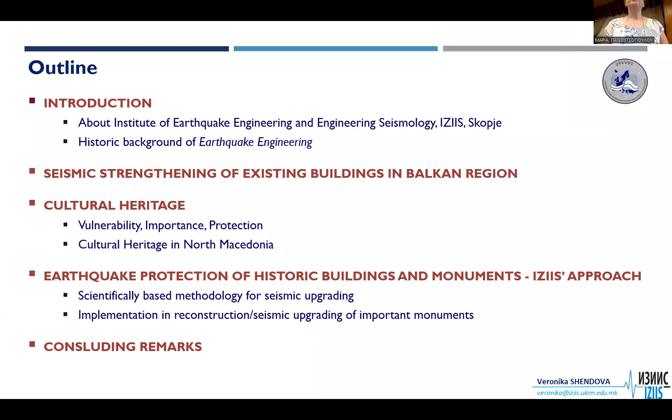I will speak today about the historic monuments and buildings in our country. I will start with some introductory slides about our institute and about earthquake engineering as a discipline. Then I will speak about this issue in the Balkan region in general for cultural heritage, and cultural heritage in our country. Then I will present the integrated approach which our institute developed and implemented in various monuments.

Our Institute for Earthquake Engineering and Engineering Seismology was established in 1965 upon the recommendation of UNESCO within the St. Cyril and Methodius University Skopje. While meeting the immediate needs for the recovery of Skopje after the catastrophic earthquake in 1963, it created conditions for permanent progress in education and training, in research and science, and of course in applying this knowledge into everyday practice. In its basic activity, our institute is organized through 6 departments, 5 laboratories, and one Center for International Cooperation that we present today here.

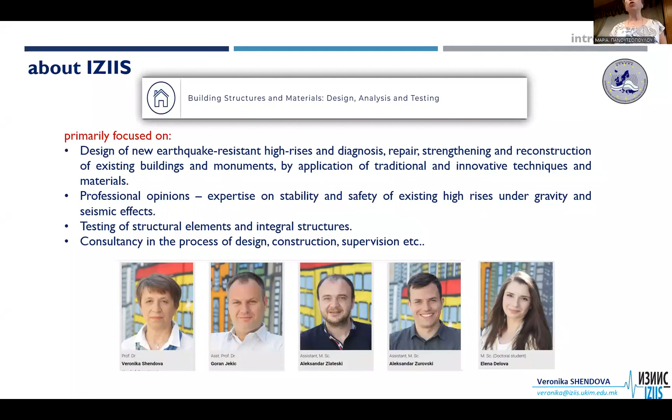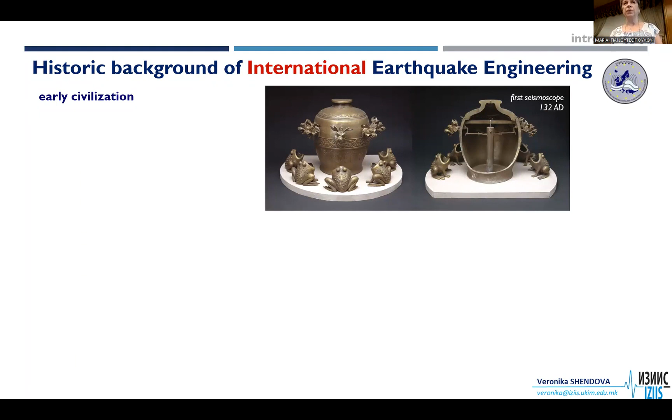Because our institute is inevitably connected with earthquake engineering, the next slides will recall some historic background. The protection from earthquakes begins with the early ancient civilizations, although at that time earthquakes were considered as God's will or the products of mystic forces. Interest in earthquakes and their consequences increased in the 19th and beginning of the 20th century, mainly after the major earthquakes in United States, Italy, and Japan.

This resulted in the establishment of very important institutions in those countries, and the birth of practical seismic design analysis of earthquake resistant structures by means of the equivalent static method, which later on was adopted in several codes.

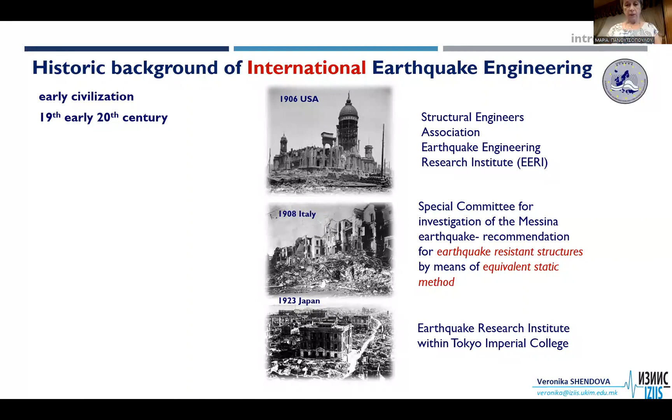We can say that the modern approach to earthquake engineering starts with the first International World Conference of Earthquake Engineering, commemorating the 50 years of the San Francisco earthquake in 1956, when there were only 40 participants from 11 countries with only 3 topics. The second one in Japan was when the International Association of Earthquake Engineering was established. This is the most important event, because since then these conferences are organized every 4 years, with continuously increasing numbers of participants, topics, etc.

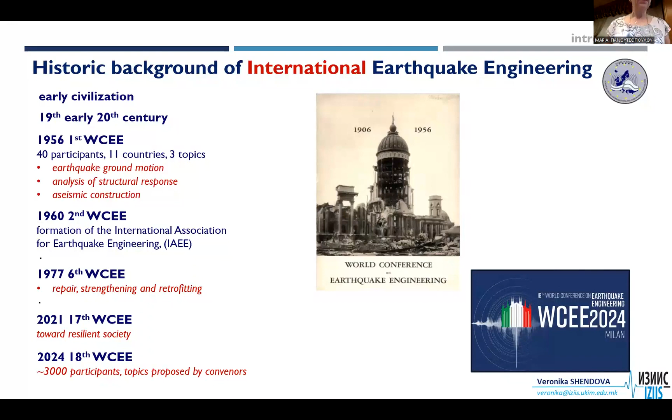The repair, strengthening, and retrofitting appears in 1977 during the 6th World Conference, coming to the motto towards resilient society in the last one in Japan, which we can say reached the ultimate goal of earthquake engineering, which is to control the seismic risk at socio-economically acceptable levels. At the next one in Milan, it is expected that more than 3,000 participants will attend, and the novelty is that the topics are proposed by the convenors.

Similarly, we can speak about the development of European earthquake engineering. The key event for European earthquake engineering was the 1963 catastrophic Skopje earthquake, which caused 1,071 deaths, more than 3,000 injured, and losses calculated to equal 15% of the GDP of ex-Yugoslavia in 1963. This was a really unique earthquake among all the earthquakes in Europe and the Mediterranean, because it triggered a high level of awareness among all participants, the government, engineers, politicians, etc.

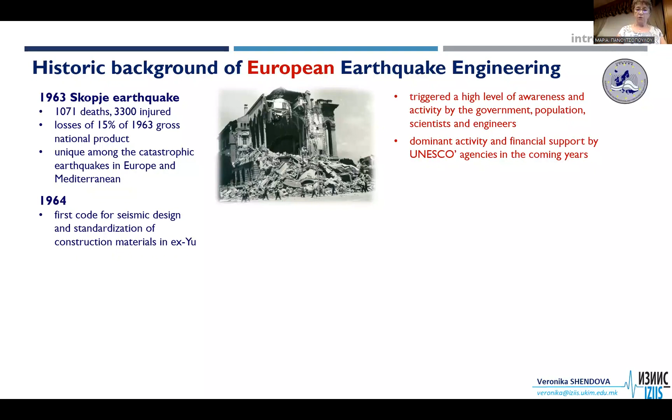This high level of awareness and activity by the government led to the need for implementation of organized and sustainable effort in disaster risk management. A very important role, as Professor Tassios mentioned, was played by UNESCO through their activities and financial support for these activities. For us, the most important outcome was the enforcing of the first seismic code in ex-Yugoslavia and first standardization in 1964, and the establishment of the European Association of Earthquake Engineering during the first international seminar, which we now call the first European Conference on Earthquake Engineering, a symbol of the beginning of European earthquake engineering.

And of course, this conference is also well organized every 4 years. The next one will be in Berlin in 2026.

During all of these conferences, great lessons have been and will be learned about earthquake performance, earthquake nature, the performance of structures, geotechnics, etc. And the majority of them have been accepted and incorporated into the codes.

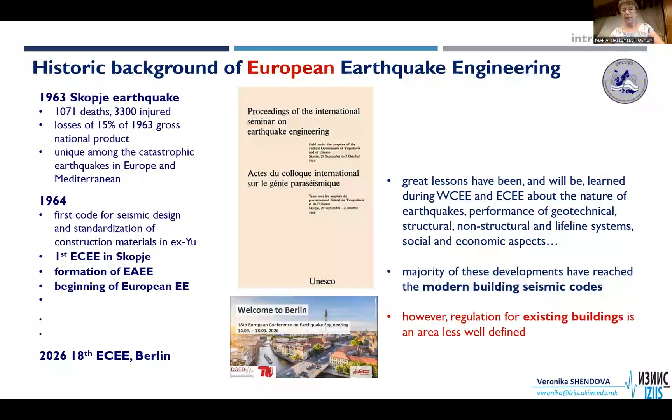However, the application of regulation to existing buildings is an area less well defined. So what happens in the Balkans in this way? Significant for this issue in the Balkan region is the manifestation of seismicity.

Skopje earthquake 1963, Debar earthquake 1967, Banja Luka earthquake 1969, all in the territory of ex-Yugoslavia, Vrancea earthquake 1977, Thessaloniki earthquake 1978, and Montenegro earthquake 1979.

So in only 15 years, several deadly earthquakes caused demolition of most of the building stock, many injured, and more than 3,000 deaths.

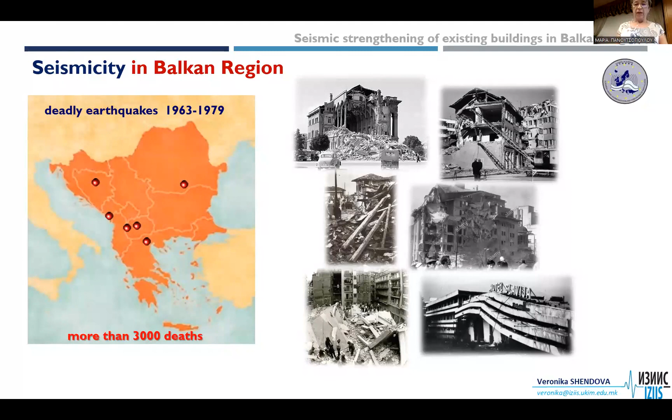The extremely important role in overcoming these problems, again, was played by the UNESCO agencies. First of all, because of the formation, establishment, and financial support of our institute from 1965 to 1982, and especially through starting and realizing the implementation of several projects due to the seismicity of the Balkan region, the earthquake risk reduction, and the construction of earthquake resistant structures.

The final one, which was mentioned by Professor Tassios, is the building construction under seismic conditions in the Balkan region, UNDP UNIDO conference, 1979-1984. The most important, why?

Because in carrying out this project, the participation of the governments of Bulgaria, Greece, Hungary, Romania, Turkey, and Yugoslavia took place. And it ends in results with several volumes which reflect the experience of the participating nations.

The fifth of them, entitled Repair and Strengthening of Reinforced Concrete, Stone, and Brick Masonry Buildings, was aimed to give instructions and define the whole procedure of repair and strengthening, drawn, of course, on the experience following all of these deadly earthquakes.

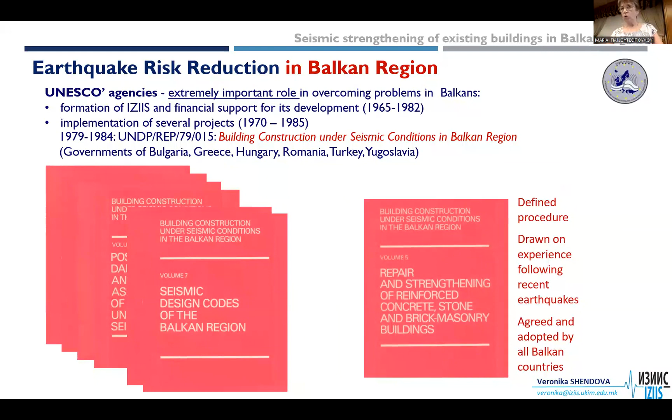And which is more important, it was agreed to be adopted by all these participating Balkan countries. Without going into details, what was written in this volume?

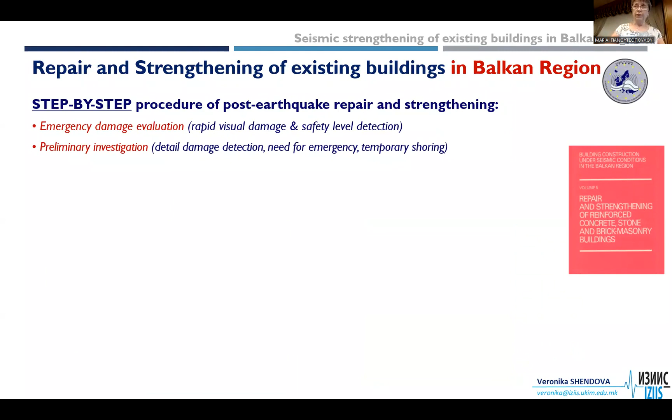As I said, this is the step-by-step procedure of post-earthquake repair and strengthening, starting with emergency damage evaluations, which should be done for each building by the inspection team to determine the usability level. Then preliminary investigation, done by the structural engineer, to determine the cause, nature, and extent of damage, and consequently the need for emergency and temporary shoring.

Definition of seismic parameters for the region. This means the seismicity, the seismic potential of the region, through different types of PGA, dynamic amplification factors or spectrums, etc. But all the countries agree that it should be defined.

Then designing the criteria for repair and strengthening, mentioned many times here. The most general ones are that we have to have linear behavior of the structure during moderate and slight earthquakes, which can be correlated with the performance of the structure by relative story displacement, but anyhow ductility less than 1, because this is elastic.

And we can allow the building to have nonlinear deformation for more severe earthquakes, which means ductility more than 1 for different types, different numbers, but not to disturb the global stability of the structure. These are the most general criteria adopted by the Balkan countries.

Then we have to do an additional investigation, mentioned several times here, for the completion of knowledge of the as-built structure, meaning documentation, investigation of the bearing elements, the built-in materials, construction details, and damage analysis and evaluation.

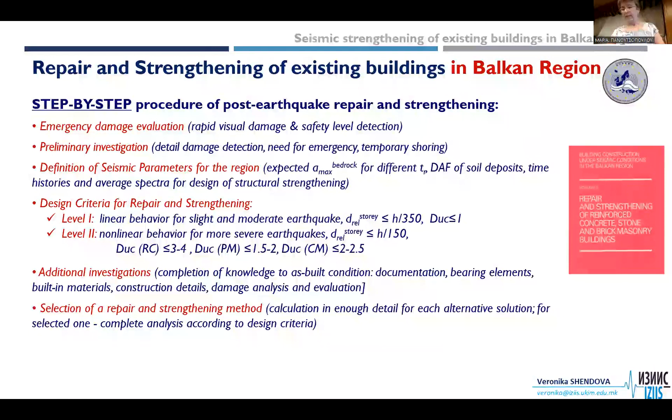And final design procedures, also mentioned several times here: detailed calculation and structural analysis for defined seismic parameters, for code requirements, etc. So all of this was written into the 1984 volume 5 of this very valuable conference.

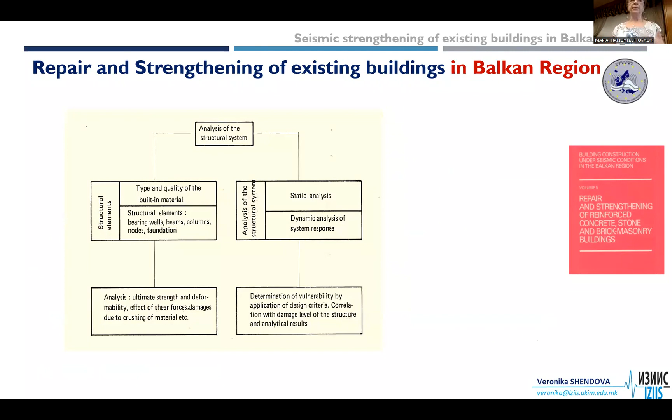Of course, analysis should be done on the corresponding mathematical model, taking into consideration the whole situation of the structure itself, the structural system, and the bearing materials, and it can result in either repair or repair and strengthening.

And in this context, as mentioned by Professor Stylianidis, repair is only the re-establishment of initial strength of the damaged part, and the properly repaired structure should have enough strength, but maybe somewhat reduced stiffness because of fine cracks, which is impossible to recover.

And it can be done, of course, after the damage of the structure. But strengthening, or reinforcing as translated by our translators here, is the judicious modification of the strength and/or stiffness and/or deformation capacity of the structural members or the structural system.

And it can be done in different ways, either by strengthening existing elements or by introducing new ones for increasing the lateral resistance of the structure.

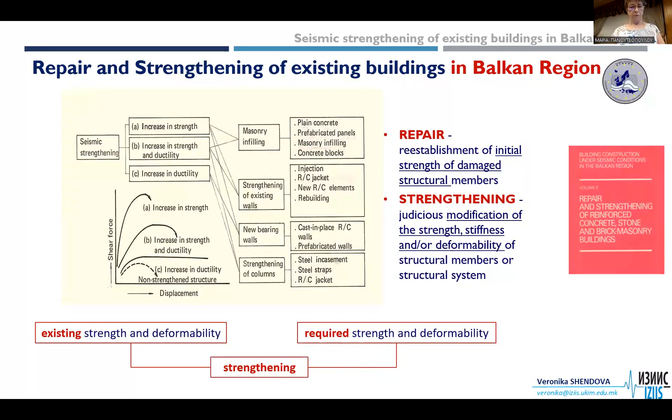The strengthening should bridge the gap between the existing and the required or demand strength and deformability. In keeping with this philosophy, on the territory of ex-Yugoslavia, these volumes are still regarded as unmatched in defining this step-by-step procedure and all the explanation that goes with it. In keeping with the philosophy of these manuals, our institute succeeded to repair and strengthen dozens of structures with different functions, structural systems and materials, after the major earthquake in Yugoslavia. So this is post-earthquake strengthening.

Now coming to cultural heritage. We all know that these monuments are vulnerable both to man-made and natural disasters throughout historic time, on nearly every continent. We are witnessing very heavy damage to these structures during earthquakes. Why is it like that? Because these are brittle and very stiff structures with stiff structural elements, which prevent the structure from being able to sustain the deformation required by earthquakes.

But there is also intended damage to cultural monuments, unfortunately. For example, during the disintegration of Yugoslavia: the shelling of Dubrovnik, the blown up church in Mostar, the blown up old masonry bridge in Mostar, then the fire in the Prilep Mosque, the detonation of the Lešak Monastery, fire in Kosovo, and of course the most recent one, the civil war in Syria, etc. So there are many of them.

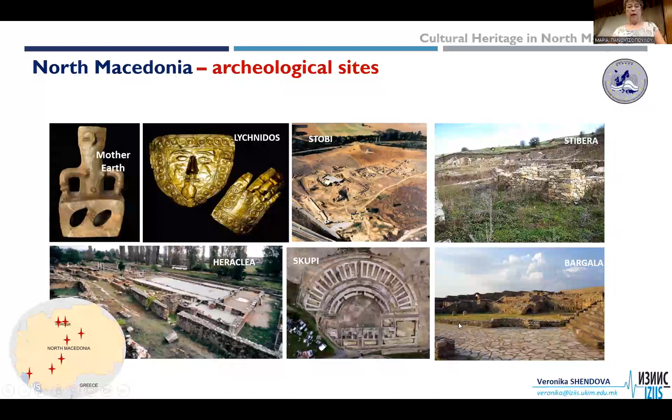Representative for the medieval times are the Byzantine churches in our country, which is of course the topmost architectonic creation, with an extraordinary collection of valuable fresco paintings. We have more than 150, starting from the 9th to 14th century.

But it seems that the Ottoman presence on our territory for 500 years left its own mark and special traces on the physiognomy of the bigger cities, in the old part of Skopje, old part of Bitola, Prilep, etc., which is the cause because we have there many mosques, many inns, many hammams, clock towers, etc.

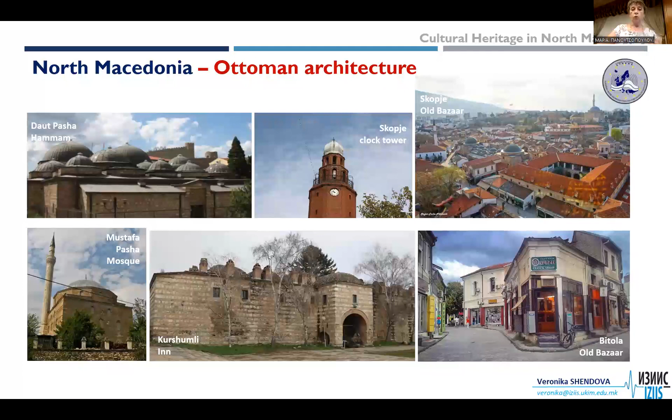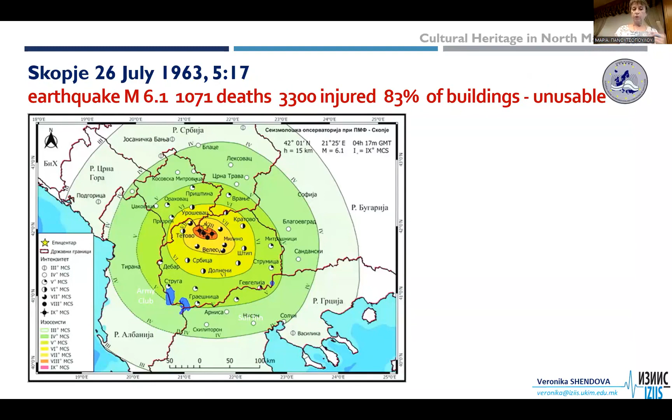But of course, because it's located in one of the most seismically active regions in the country, or in Europe, all of these monuments throughout existing times have been exposed not only to climatic and man-made effects, but also to earthquake effects. This was somehow confirmed with the Skopje 1963 earthquake. It was magnitude 6.1, and it was felt over a radius of about 200 kilometers.

This earthquake inflicted inestimable damage to the monument fund. The entire monument fund was more or less damaged. It was manifested by the failure of individual parts, like in Chifte Hammam or Suli or Kurshumli Inn, large structural cracks, or inclination of some parts of the monuments, while some of them have been lost forever.

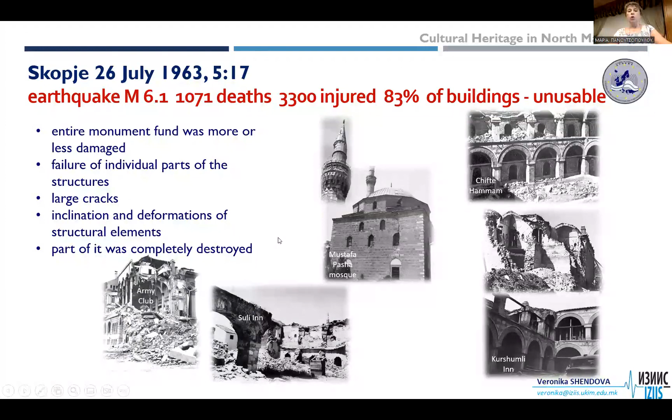So what happened in the post-earthquake treatment of the monuments? What was the legal framework? The recovery, post-earthquake recovery of Skopje starts in a period where there is a lack of knowledge, lack of regulation, lack of everything connected with earthquakes, because until then, on the territory of Yugoslavia, there is no such code or provisions. That is why the Yugoslav government starts the campaign for enforcing these guidelines and the first code in 1964.

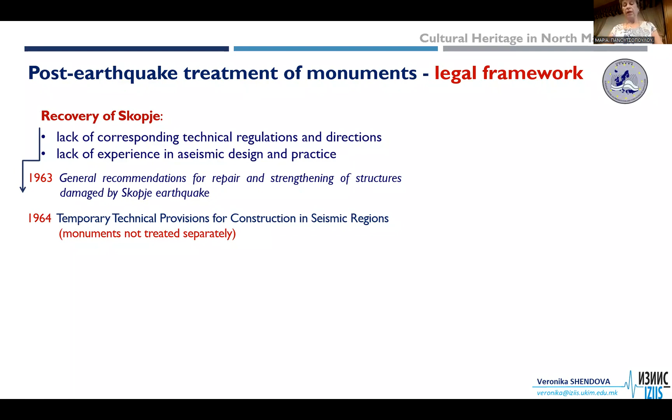But in both of these documents, there is nothing special for the monuments. This is only for new buildings, etc. Maybe repair and strengthening, but of ordinary structures. The first legal framework is in 1976.

This is the Law for Protection of Cultural Heritage. This is the very first legal framework, but there is only, let's say, some terminology, a glossary connected with labeling and categorization of the monuments, but a very poor one, of course, and some very beginning of the process of protection and organization of protection.

Following this were the Code for Design and Construction, an improved Code for Design and Construction of Buildings in Seismic Regions, and the Code for the Repair and Strengthening of Buildings. But again, the first one is for new buildings, predominantly reinforced concrete and confined masonry, and the second is for repair and strengthening of ordinary buildings. So again, nothing special about the monuments.

After the disintegration of Yugoslavia, our country enforced a new law for protection of cultural heritage, this time more precise and detailed, introducing responsible institutions, categorization of monuments in parallel with the regime for protection and use, guidelines for carrying out conservation research, and guidelines for how to elaborate conservation projects. Besides this, it also regulates the rights and obligations of owners, professional titles, and other issues. What's important is that this law, as a law, is a legal framework.

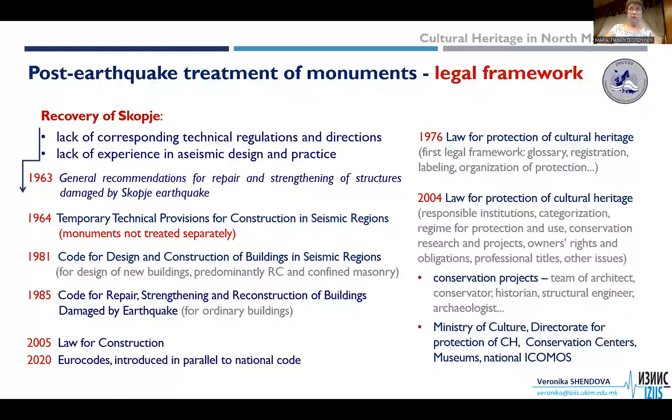The new law for construction was in 2005, and in 2020 we introduced Eurocodes for the first time, in parallel with our national code. We can say that our experience here is still exceptionally modest.

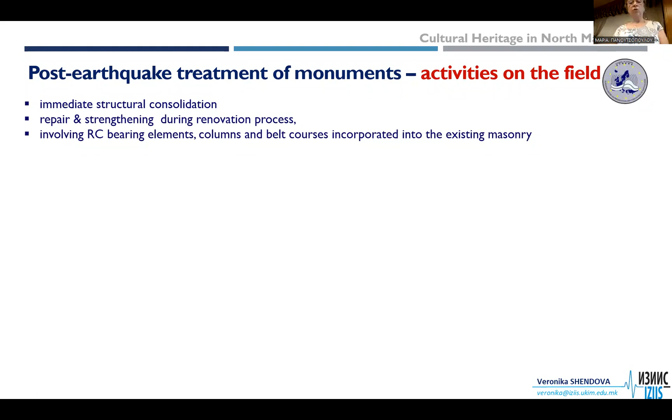So, post-earthquake treatment of monuments: what was done on the field? This starts immediately with structural consolidation, but in the process of renovation, especially for those monuments needed for modern use, the principle of repair and strengthening was involved. Unfortunately, based on the knowledge of that time, this involved reinforced concrete elements introduced into existing masonry. There are many of them that were recovered or reconstructed by introducing reinforced concrete.

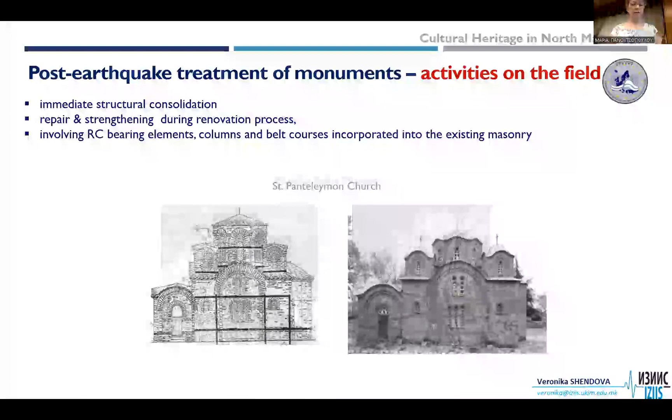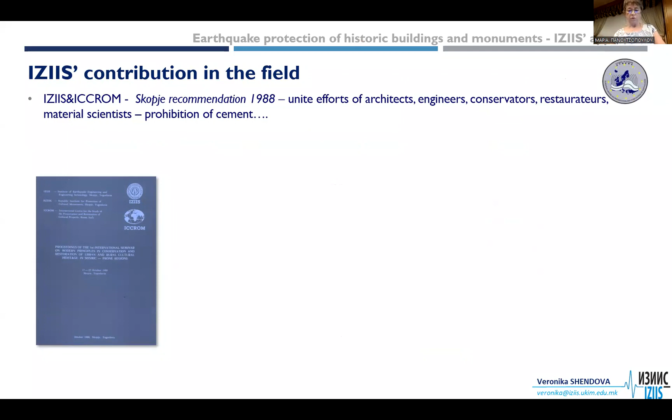Unfortunately, later on, during visual inspection of the monuments, it was estimated that this cement could obviously affect the original bonding material, the lime mortar. That is why during the ICCROM seminar in 1988, based on the ideas of architects, conservators, and engineers participating in this conference, the final document, the Skopje Recommendation, recommended a multidisciplinary approach connecting all these profiles and prohibited the use of cement in the subsequent retrofitting of monuments.

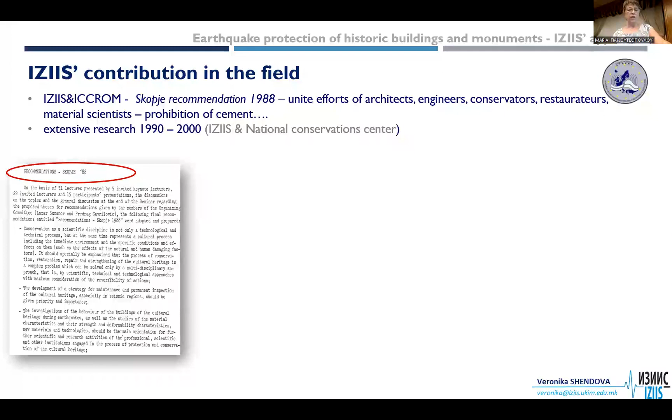And since 1990 until 2000, we became partners with the National Conservation Center, providing many different projects connected with finding the most appropriate ways to seismically upgrade our monuments.

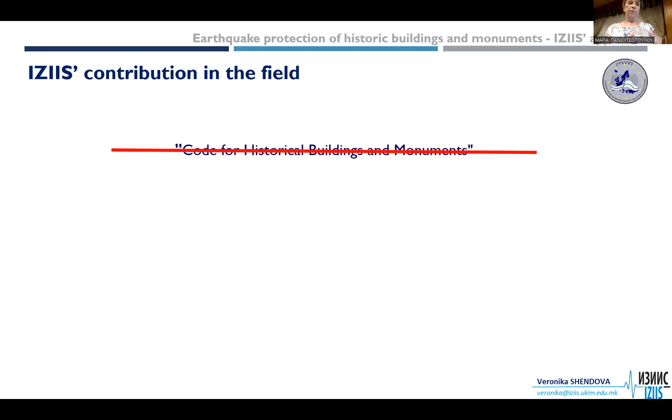Coming to the point where maybe we disagree with you: our starting point in our institute is that as professionals working in this field, we should strongly oppose the existence of a code for historic buildings and monuments. Why? Because codes become outdated, and all these monuments have been constructed in different times under different conditions. So we think that unification of requirements in one code may lead to the negation of the monuments.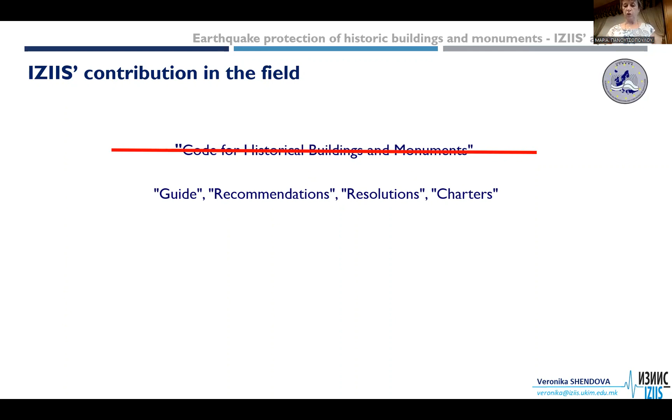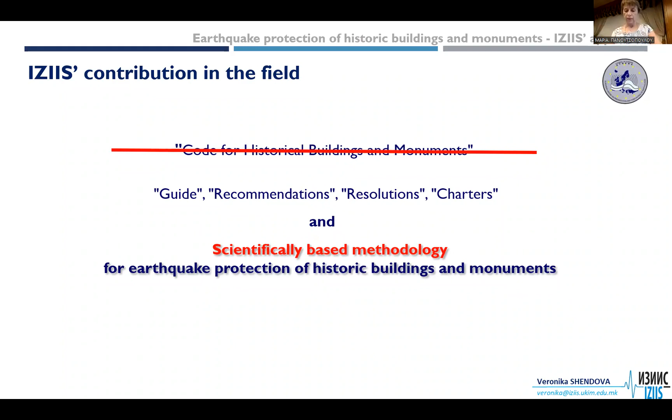But we, of course, recommend acceptance of guides, recommendations, resolutions, charters, and for exceptionally valuable monuments, to scientifically develop a methodology which will be implemented later on.

During several decades of working on this subject, our institute adopted one integrated approach protocol for the development of this methodology, and this is very similar to what you are talking about today. So we are saying it is the protocol, the approach, not a code.

First of all, we should review all the data we have: the technical, written, and photo documentation, archive investigation, because there is a lot from past years. We conduct interviews with the owners, read all the professional statements, to increase the knowledge level of the as-built structure.

Then we have to define the real seismic potential of the site where the monument is located, through seismic microzonation, and develop geophysical surveys and models, including soil profiles and soil effects, which will result in the demand or required peak ground acceleration for our analysis.

Then structural identification. As Professor Tassios once said, monuments are black boxes, so we have to learn from them. We spend time there just to see what the structural system is, identify the bearing elements, etc.

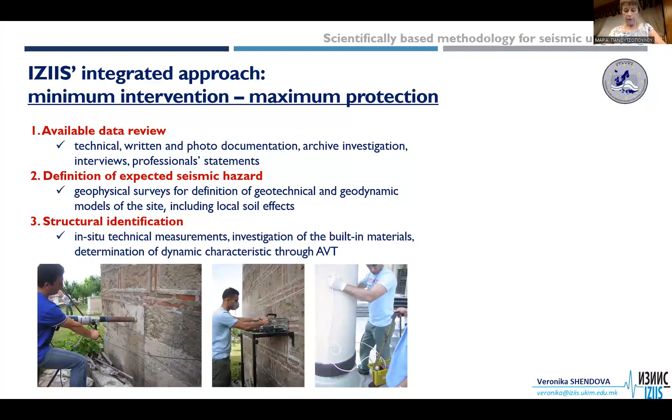Through different in situ measurements, we investigate the building materials. But what is rather specific is that in any case we are providing the ambient vibration technique.

This technique involves placing, at a specific level, very sensitive sensors which can measure vibration from the ambient environment, from the wind, from everything. Why is it important? Because we obtain the fundamental periods and mode shapes of the structure itself.

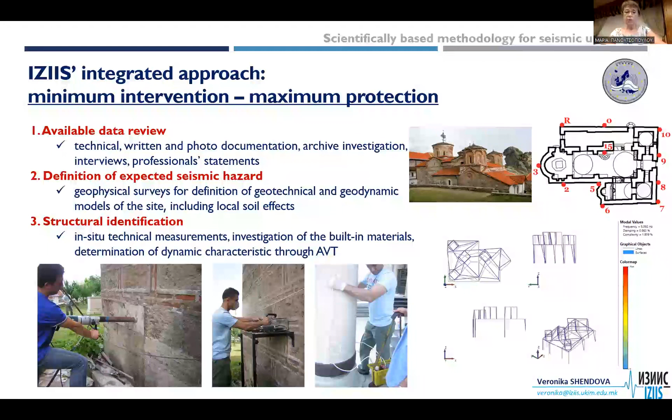If this is very precise, we can find out what are the disconnections, the points which are not good in the structure. This is very important because it is experimental testing in situ of the fundamental dynamic characteristics, which is the identity card of any structure.

Then structural analysis—there are different types, as mentioned several times, but what we do is 3D finite element modeling. We calibrate and modify the input values, especially the modulus of elasticity, until the fundamental period of the model structure equals the one experimentally obtained during ambient vibration testing.

So this connects the on-site situation with our mathematical model. Then we provide two different methodologies, which I will speak about in the next slides: bearing and deformation capacity, and time history response. Finally, we come to the seismic retrofitting.

The most important thing in seismic retrofitting is the definition of safety criteria. As many of us have said today, we have to know what requirements our structure should satisfy. Then we select the concept, materials, methods and techniques, and provide verification structural analysis, along with definition of field works and subsequent documentation—always keeping in mind that the strengthening or retrofitting should bridge the gap between demand and existing capacity.

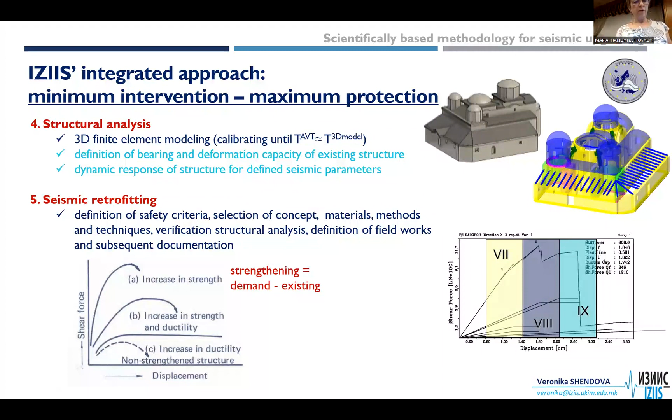Now, the key elements are the definition of bearing and deformation capacity and the dynamic response of the structure for the defined seismic potential, which is exactly the point.

What do we understand by bearing and deformation capacity? This is connected with volume 3. By the bearing capacity of a story of the structure, we understand the ultimate story transversal force, which compared with the demanded equivalent seismic force gives the safety factor against failure. The deformation capacity is the ductility, or story ductility capacity, meaning the ratio between the maximum story displacement and displacement at yield point.

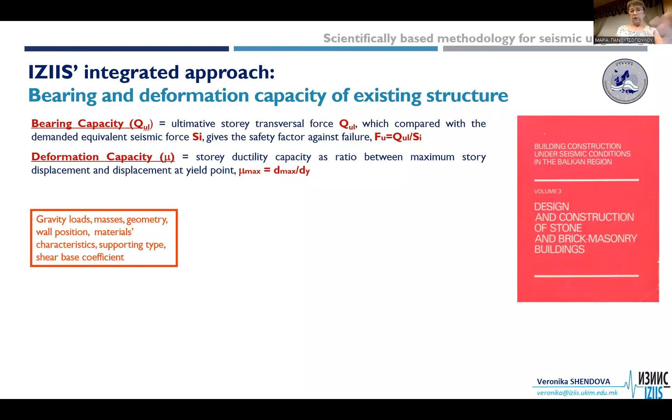So what does this mean? It is calculated by our in-house software according to the methodology presented in this manual. The input values are gravity loads, masses, geometry, wall position, characteristics, and of course the shear base coefficient or peak ground acceleration needed for the seismic parameters.

Then we provide the limit state analysis of each of the vertical elements in the structure, or each vertical pier. This depends on the level of detailing of the modeling, by calculating the bending and failure capacity, bending and shear capacity of each element using these expressions, representing the maximum horizontal force that the element is capable of sustaining in the case of failure, either shear or bending.

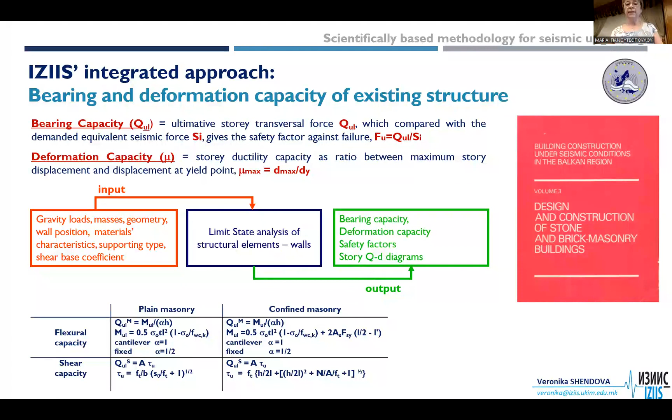This results in the bearing deformation capacity, what we call the story Q-delta diagrams, meaning each of these elastoplastic lines represents the Q-delta diagram for each of the walls. By summing all of these, we arrive at the cumulated story Q-delta diagram, which is the input diagram for the hysteretic response to the defined seismic parameters in the dynamic time history analysis.

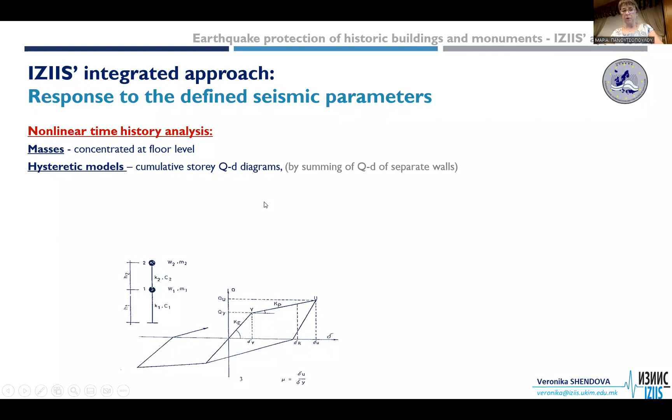The specificity here is that in this nonlinear time history analysis, we assume our structure follows a shear type structural model, meaning all the structural characteristics, masses, etc., are concentrated at the story levels. In this analysis, the hysteretic model is the cumulative story Q-delta diagram, obtained by summing the Q-delta of the separate walls.

With these input values, we perform the nonlinear dynamic analysis, and the output is the time histories of the story displacement, velocity, and acceleration. By comparing the capacity, ductility, and displacement capacity with the demand, we can talk about the performance of our structure.

For example, in this photo you can see the capacity during yield, and this is the ductility capacity at the ultimate point. So in this area here is linear performance, and this area here is nonlinear capacity for nonlinear performance of our structure.

Our analysis also gives the demand, or required displacement, for all of these stories, for example at a particular peak ground acceleration, and we can compare which stories, for which earthquakes or peak ground accelerations, have capacity or not.

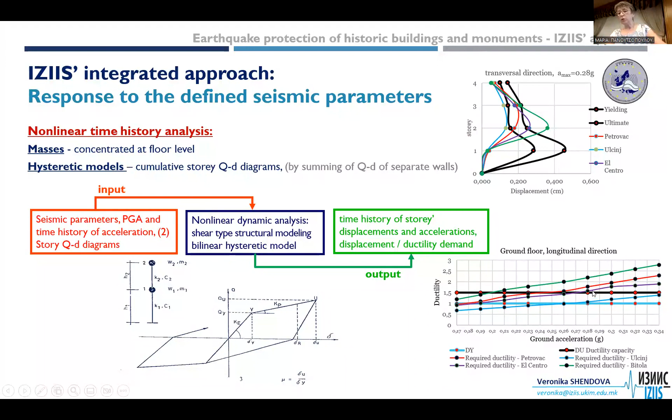Similarly, we can compare the ductility capacity. This is ductility 1, meaning the yield point, and this is the capacity of this particular building - I don't know exactly which one. All of the ductility demand above this line means those stories don't have the capacity.

Very shortly, there are several slides on the implementation of this methodology, first in historical buildings. These are examples from the Montenegro earthquake of 1979, a heavily damaged case. Testing was provided in 1980, 1981 - in situ testing for comparison, to determine the characteristics of the built-in materials, since injection was found to be the most convenient method.

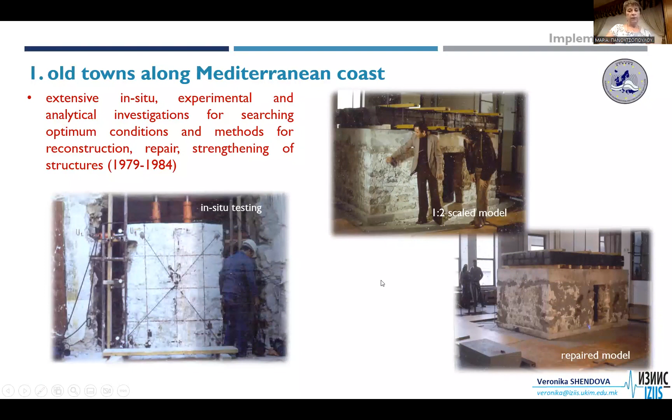For this old town of Budva, a 1 to 2 scale model was prepared in our laboratory, first with the same stones coming from Budva. The first was in the original state, with previous investigation done on the mortar, etc. After damaging, the repair model was strengthened, and this knowledge about application, consumption, and effect was applied during one year of reconstruction of the Budva city.

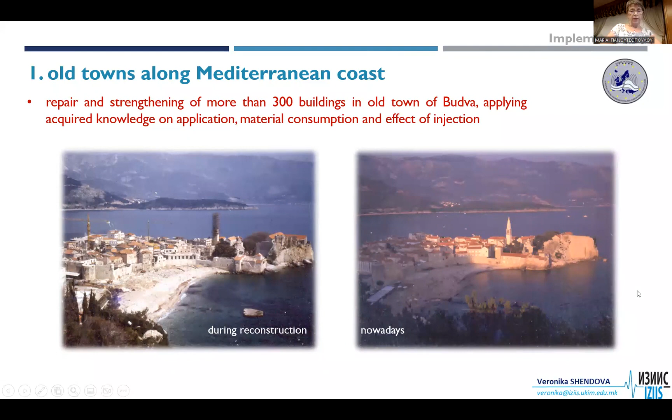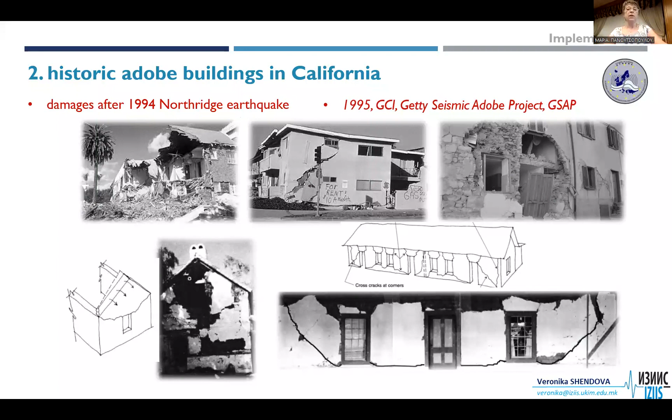The second example is the historic adobe buildings in California. After the 1994 Northridge earthquake, these adobe buildings suffered severe damage and collapse. The Getty Conservation Institute started the Getty Seismic Adobe Project in 1995 to find the easiest and least expensive methods for seismic upgrading of these structures.

As an extension of this project, there was shaking table testing at IZIIS of two models at 1 to 2 geometrical scale, a very realistic test. One is the control model, and the other is retrofitted with vertical and horizontal ordinary nylon straps with some plywood diaphragm inside. It was shown that this strengthening is very efficient because the retrofitted model did not collapse at the same peak ground acceleration.

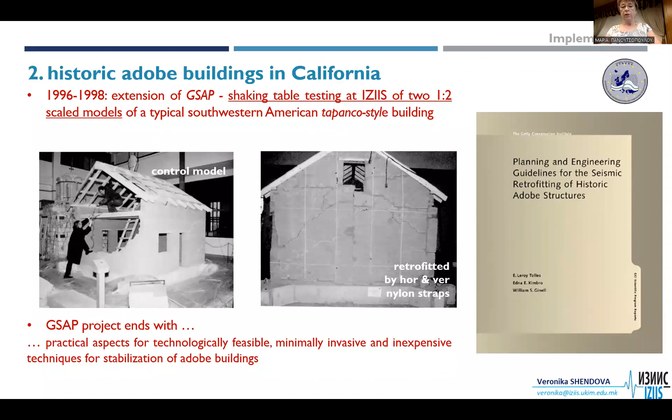This resulted in planning and engineering guidelines issued by the Getty Conservation Institute, providing guidance for these easily applied retrofitting techniques, and dozens of structures have been retrofitted this way.

I will not speak about the Parliament building in detail, because this will be presented by my colleague Goran Jekic.

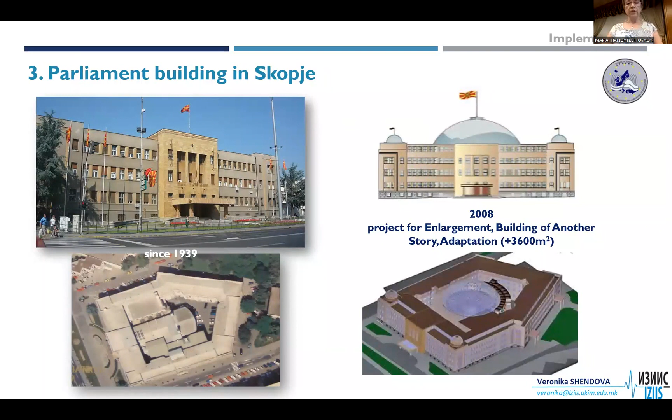This was a very challenging, many years lasting project during the designing process, but also during the construction. It was successfully constructed and during the continuous function of the building, which is very important, during the 2016 Skopje earthquake with 5.3, there was no structural damage, and also no non-structural damage at all.

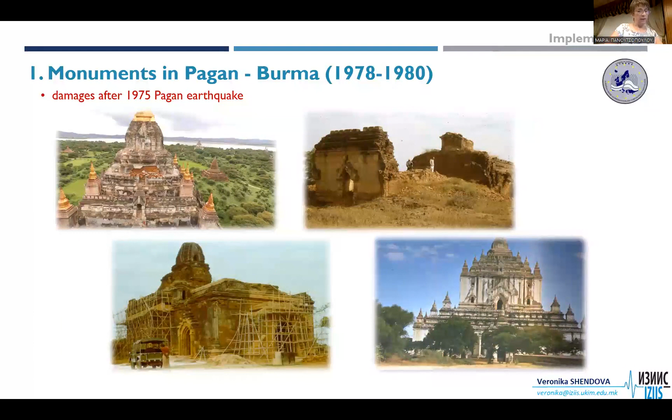Implementation in the field of monuments: the first one is from the 1975 Pagan earthquake, in the Pagan plateau, characterized by magnificent pagodas and temples, that was very severely damaged during the Pagan earthquake. This was during the period of the UNESCO and UNDP efforts.

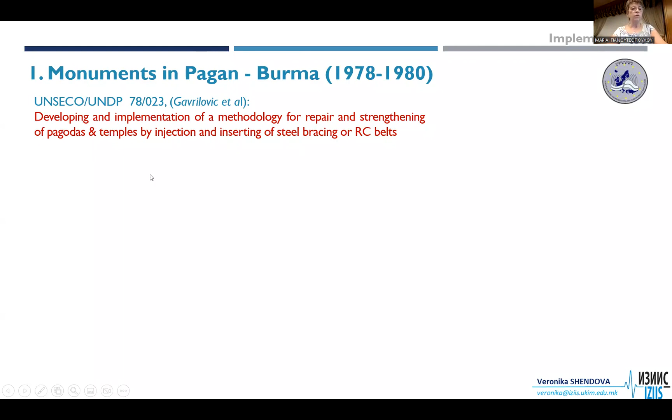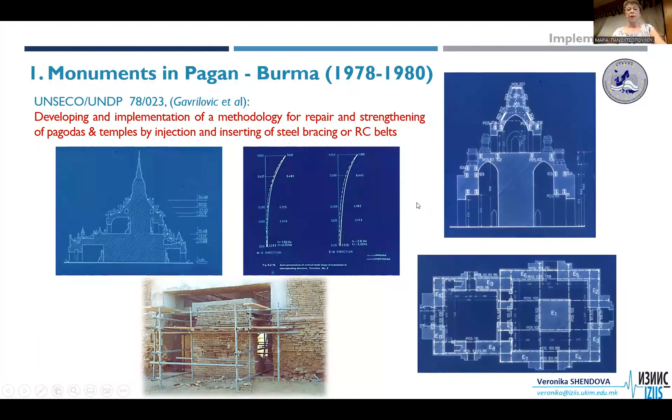The principal investigator was our professor emeritus Professor Gavrilovic. They developed and implemented the methodology for repair and strengthening, with detailed geometrical investigation, ambient vibration technique, in situ inspection of the characteristics of the built-in materials, which finally resulted in inserting steel bracing horizontally across and RC belts. In the period after that, 15 pagodas and temples were restored in this way.

What is very important, during the 2016 earthquake with 6.8 in Myanmar, there was no structural damage. This example we are really, really proud of, especially me, because this was my doctoral dissertation.

This is a very unique scientific research project of conservation, repair, and seismic retrofitting of Byzantine churches, which has two primary goals: first, to see what is the vulnerability of the structure, and of course, what is the most appropriate way to seismically upgrade them.

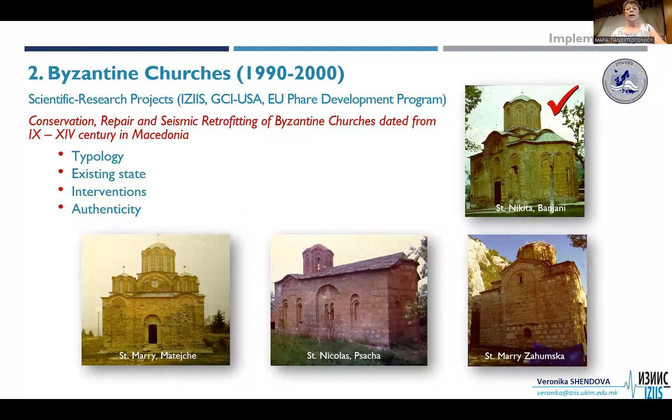These are four structures for which ample laboratory and in situ investigation have been done. These were selected as more representative according to this criteria. The Church of St. Nikita, which is very close to Skopje, was selected as a representative for all of these Byzantine churches on the territory of North Macedonia for further in-depth analysis.

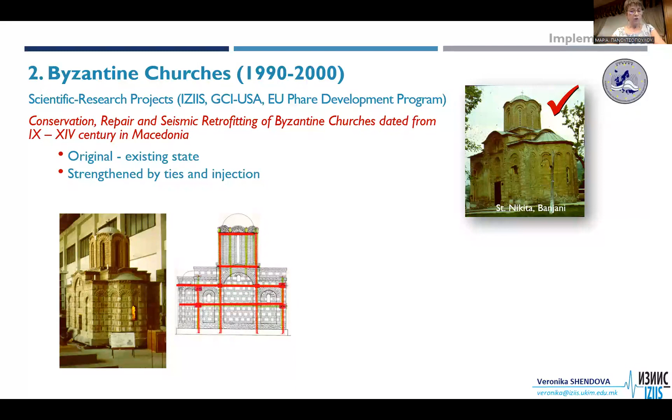For the shaking table test, which was done for the first time in the world, a physical model at 1 to 2.75 scale was used, first in its original state, then strengthened by ties and injection as a traditional way, and after that, base isolated. All of these projects have been done with GCI financial support and Phare Development Program.

What we'll see in this video, a very short video, is a comparison of these two methodologies, the traditional one and the base isolation one. This is for the earthquake which is, let's say, the maximum expected for 1,000 years.

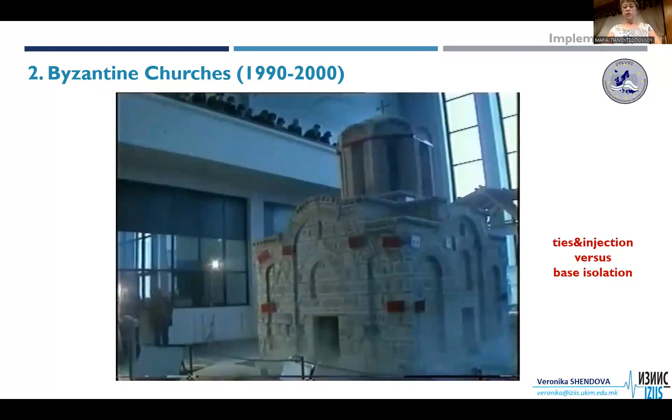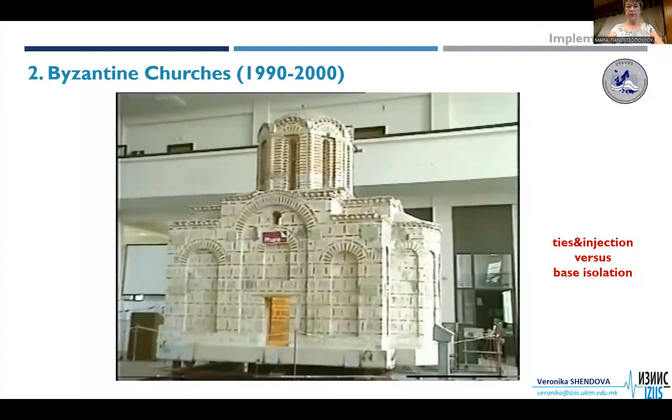As you can see, this is the performance of the structure strengthened with ties and injection, heavily damaged, but still not disturbing the global stability. With base isolation, nothing special happens because all the energy is absorbed by the seismic isolators.

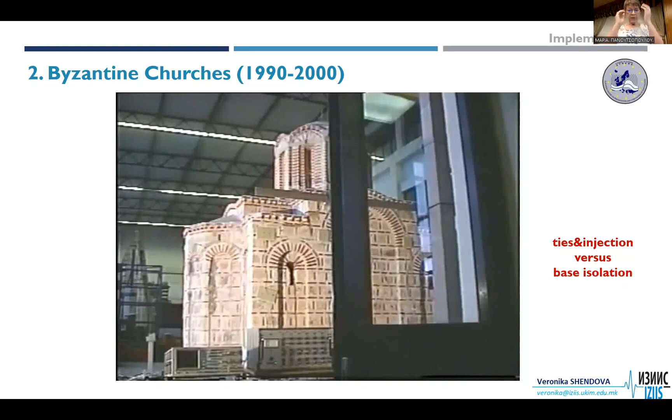This should perhaps be imperative in future for these monuments, but we don't have permission from the archaeologists. Although we prepared the project for the St. Nikita Church, it was not allowed. But we have a challenge to implement this in other several structures, though I have to emphasize it is in the process of reconstruction, meaning we have some ruins, some parts, not the whole structure.

The first one is the St. Pantelymon Church in Ohrid, very important for us. It was a church, then a mosque, etc. So these are the remains.

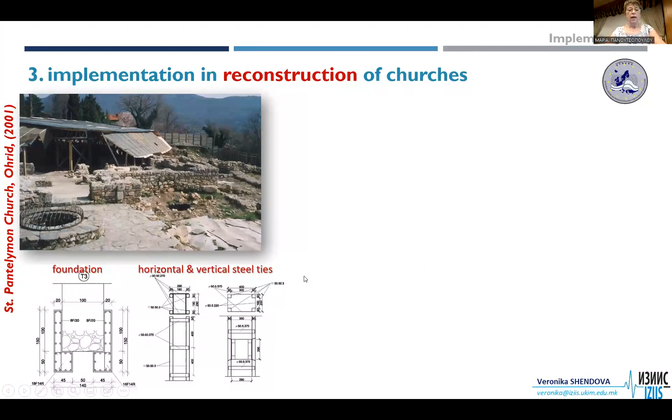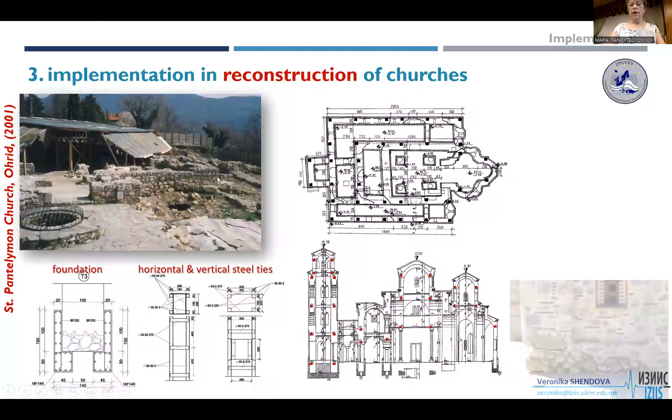In the process of the project, there was strengthening of the foundation by reinforced concrete elements and incorporation into the masonry of horizontal and vertical steel ties, according to the previously experimentally verified methodology, just to convert the church's structural system from a plain one to a confined, or frame masonry, structure. This was realized during the beginning of the 21st century.

Nowadays, this is a very important touristic place.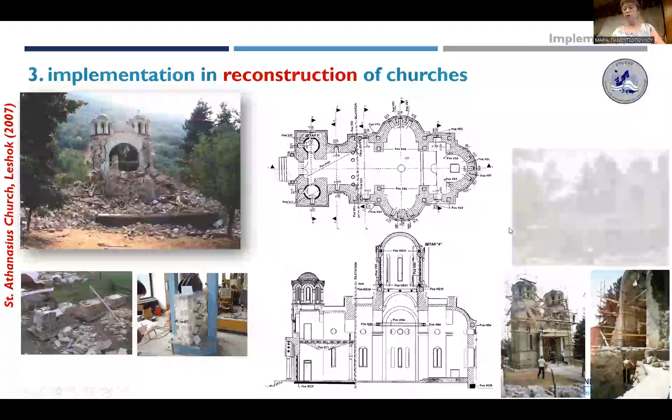In our concept, we have two approaches: one is repair and strengthening using reinforced concrete where there are no frescoes, etc., in the heavily damaged part, and complete reconstruction with maximum possible use of the same material for the demolished part of the structure. You can see here these vertical steel elements, once again converting the plain masonry into frame masonry.

Also completed is the implementation of the methodology for the reconstruction of the Church of Holy Trinity, which was blown up during the Yugoslavia disintegration in Mostar. Once again, we started with the approach because our task was to address a masonry structure, not a reinforced concrete one.

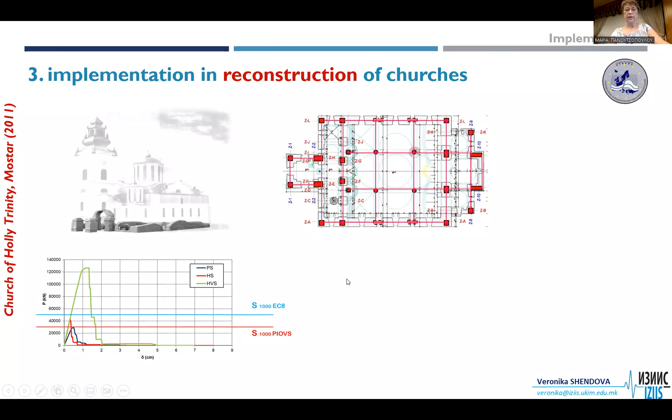We started with three main general principles: plain masonry, shown in dark blue; masonry with horizontal belt courses, shown in red; and masonry with horizontal and vertical elements, shown in green, which according to the methodology, experimentally verified, reached the demand seismic force according to Eurocode 8, which was our task. This work has also been lasting more than 10 years, but nowadays we have completed it.

The fourth case is seismic upgrading of existing churches - not ruins, but functioning churches. Here we are very restricted, not allowed to incorporate vertical elements, only horizontal ones into the joint lines, the facade joint lines, connecting them to achieve integration at the characteristic level, as repeated several times, to tie up the church and increase its seismic resistance.

And the final one is now the mosque. This is once again a scientific research project realized as part of the European Framework 6 PROHITECH project, concerning the seismic retrofitting of Mustapha Pasha Mosque, one of the biggest and best preserved in the Balkans, located in Skopje.

As I showed earlier in this slide, it was heavily damaged - structural damage, inclination of the minaret. After the Skopje earthquake, based on the level of knowledge at that time, it was strengthened or upgraded with reinforced concrete elements.

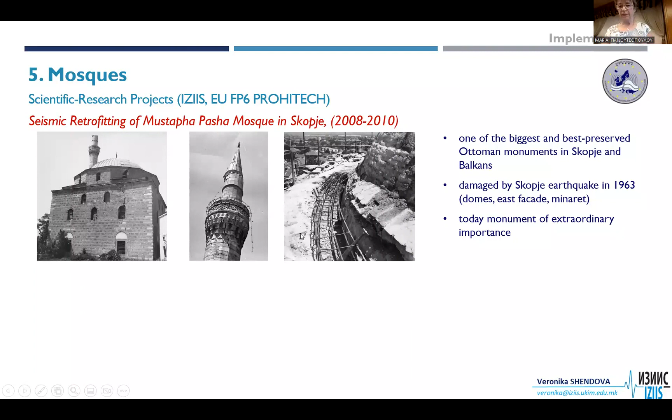Together with Turkish Yildiz and METU University from Turkey, we carried out joint projects, several bilateral projects, and performed in situ investigation, taking samples and investigating the materials. Of course, we also used ambient vibration techniques to obtain fundamental periods and mode shapes.

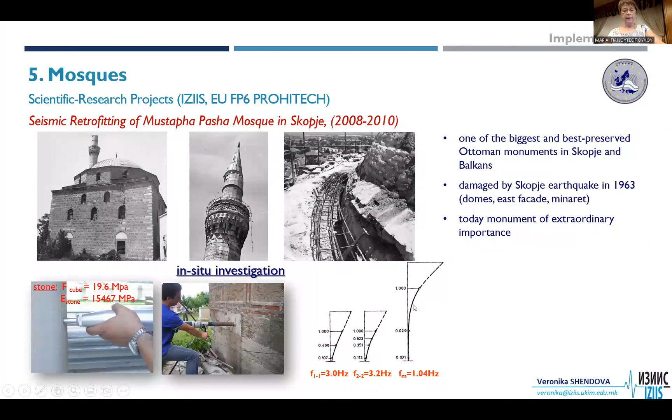We also obtained qualitative testing of the wall elements to have a good interpretation for the subsequent shaking table testing of a 1-to-6 scale mosque model, realized in our laboratory in both original and strengthened states.

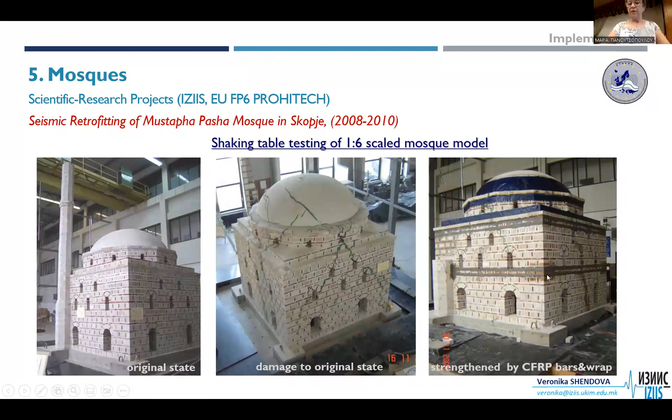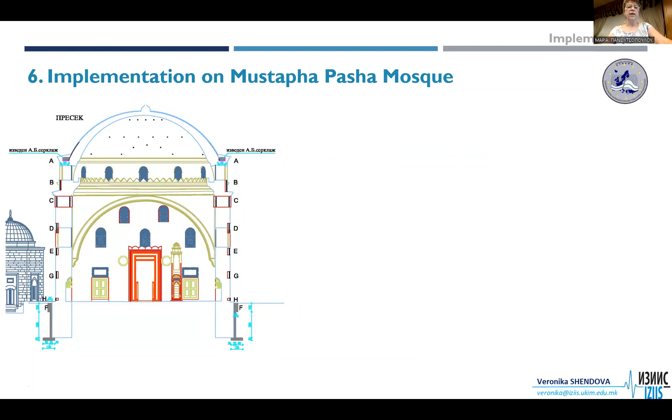So we had a challenge afterward to design this strengthening for the real Mustapha Pasha Mosque, very briefly: removing the old cement mortar, injecting lime mortar into the dome, then isolating this with a reinforced concrete belt course, applying the CFRP wrap about 2.5 meters, and covering with lead.

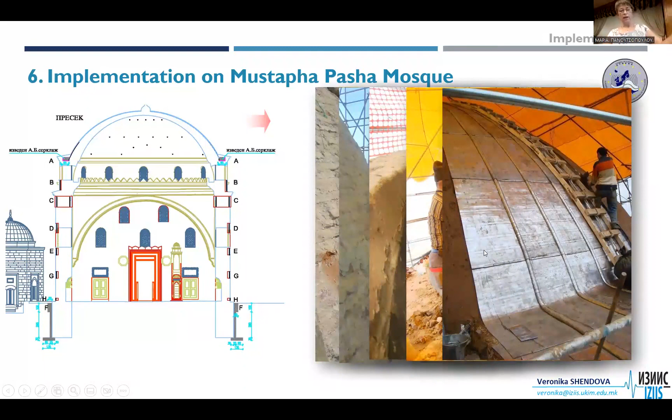Into the walls, we first removed all the cement about 7-8 centimeters inside, and incorporated the CFRP bars there. It's about a 7 millimeter bar, with 2.5 or 3 centimeters of mortar afterward, just to protect it from temperature effects, etc.

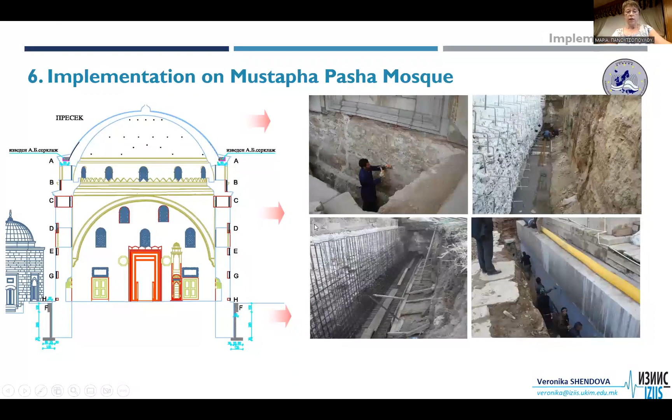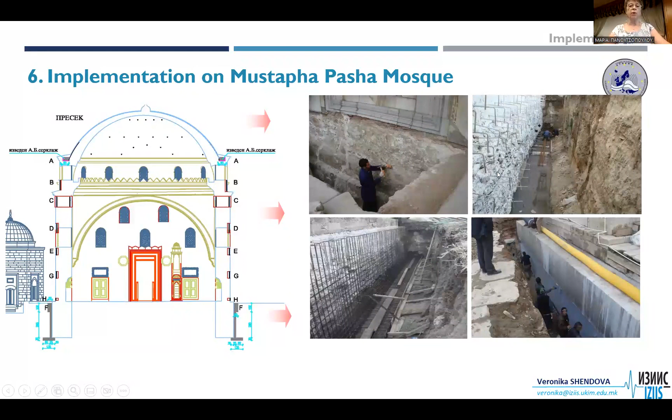Below the terrain, we designed a ring all around the mosque, down to the foundation level, with a reinforced concrete wall physically separated from the old masonry by a polyurethane layer, which was a requirement from our Turkish colleagues.

Following this very successful example, we also achieved successful implementation of CFRP strengthening in mosques in Pristina, Bitola, and Ohrid, and nowadays there are ongoing projects in Strumica and Prilep, all in our country.

I will finish with this point: the most delicate problem or challenge in these historic buildings is the selection of materials, methods, etc., which can be successfully overcome by using this methodology of design by testing, which is also now incorporated in the Eurocodes. It is a very powerful tool, especially for these complex structures, which are difficult and unsafe to analyze using traditional methods.

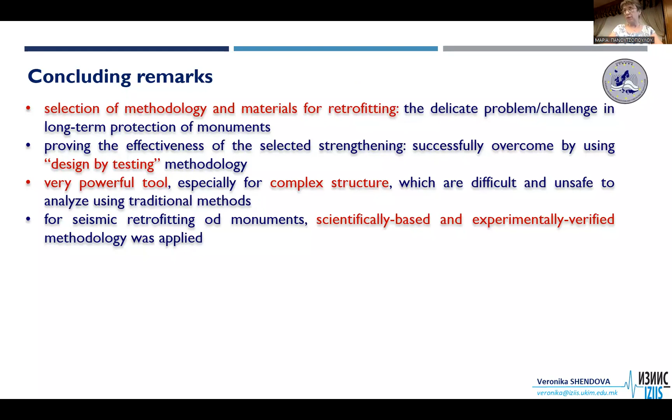Our institute's achievement is to retrofit monuments based on scientifically grounded and experimentally verified methodology, which has been applied to several very important monuments.